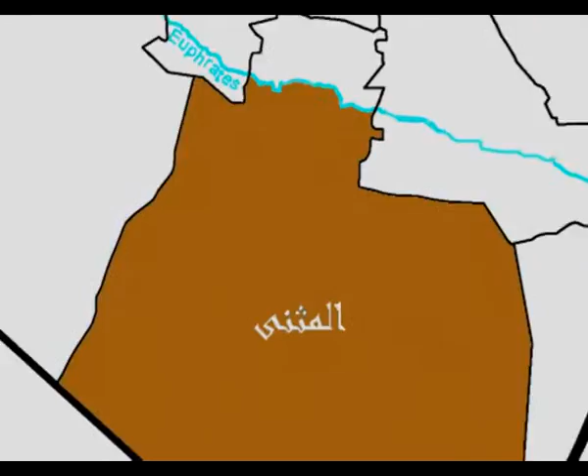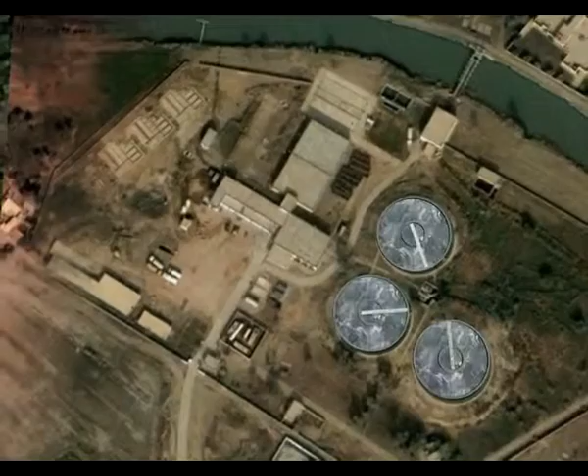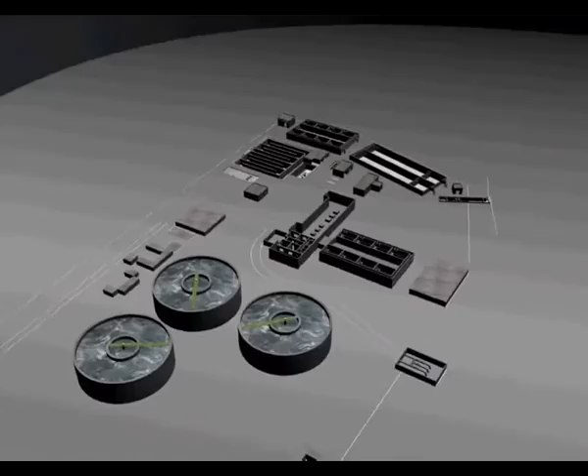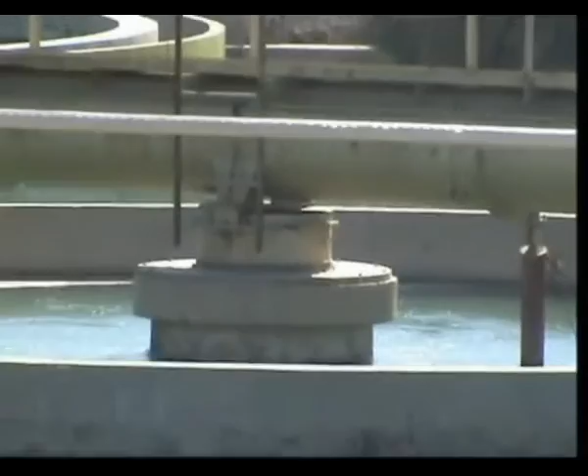The project consisted of upgrading the existing water station located on the shoulder of the Hilla River in the province of Al-Muthanna, approximately 14.5 kilometers from the Euphrates River, with an identified construction site area of 8,500 square meters. The project consisted of, but not limited to, the construction of a conventional water treatment plant with a total capacity of about 40,000 cubic meters per day,

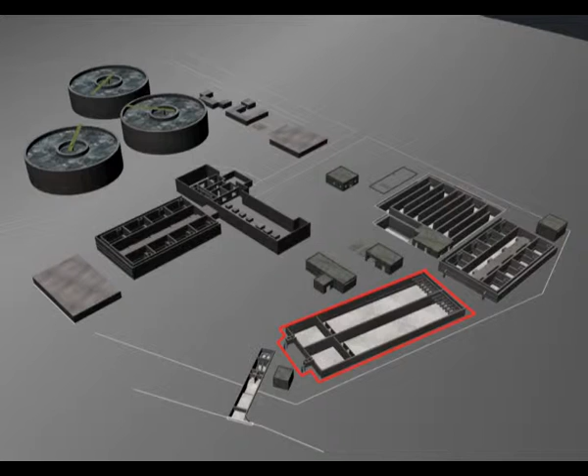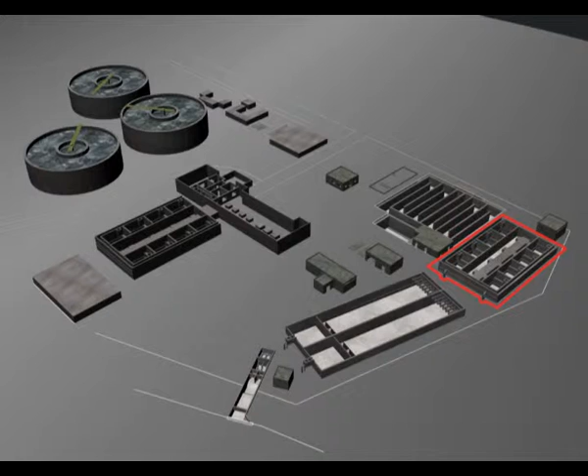comprised of the following units: intake structure and primary treatment system, low lift pumping station with a design flow of about 40,000 cubic meters per day and total design head of 10 to 12 meters, 2 coagulation, flocculation, and sedimentation tanks, each having a total capacity of 20,000 cubic meters per day and dimensions of 11 meters by 56 meters by 4 meters. A filtration building comprising of 8 gravity sand filters with dimensions of 27 meters by 45 meters by 6.5 meters.

A chlorine contact tank comprised of 2 compartments, each one being 12 meters by 36 meters by 4.5 meters. A potable water high lift pump station, 19 meters by 12 meters. An electrical substation and generator, 18 meters by 12 meters. A chemical building, blowers and chlorination buildings, auxiliary facilities, and demolition of reinforced concrete structures.

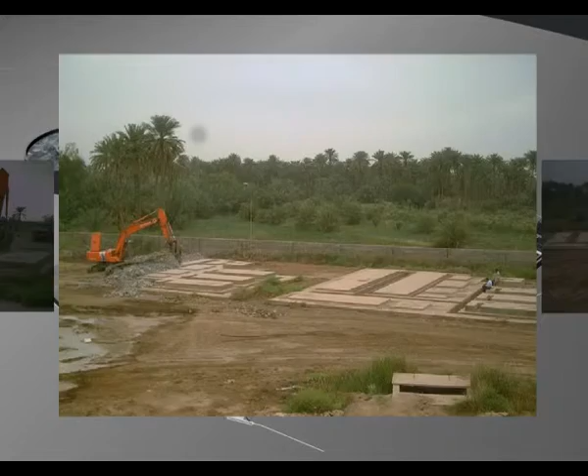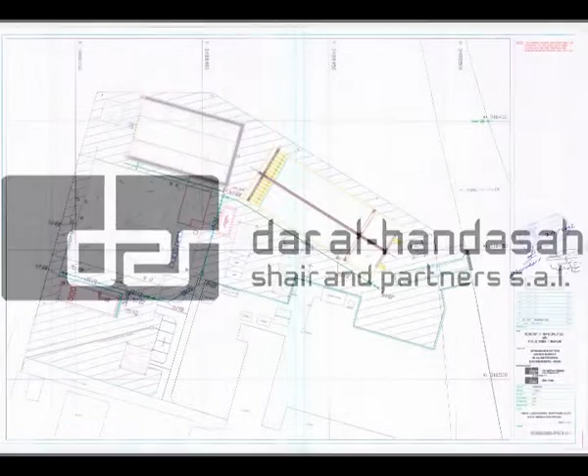The ministry awarded the consulting services to Dar Al-Handasah, an international company with extensive experience in the preparation of engineering designs. They were responsible for preparing detailed designs and tender documents, along with the supervision and follow-up implementation of the selected construction company.

Once Dar Al-Handasah finished the detailed design and prepared the technical specifications for the project, we submitted technical and financial documents under the pre-qualification process. Once we passed the pre-qualification process, the Ministry awarded the project to our company with an 18-month contract duration starting May 10, 2007.

The following is the progress of work. Planning and follow-up by the head office in Amman, Jordan. Our company prepared a detailed timetable for the implementation of various items of the project using Primavera. Due to the vast numbers of buildings, tanks, and other components, and to ensure completion of the project within the contractual period, each part was considered separate from the other during the implementation phase based on the type of service the building provided. It was then handled according to the coherence and logical sequence of events for that building type.

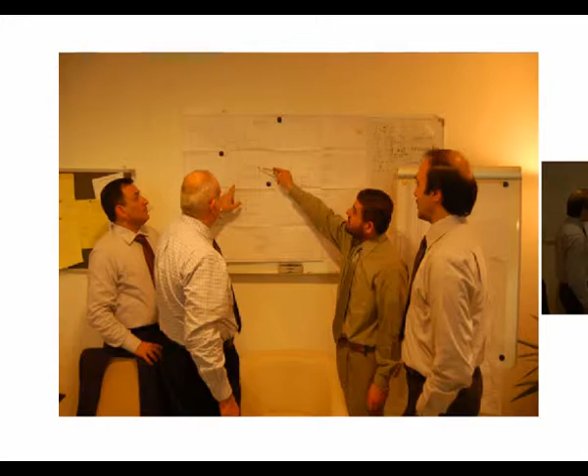After that process was finished, we conducted an engineering review to evaluate the proposals in terms of technical work and developed a short list of suppliers. Suppliers were then selected based on their offer price and technical capability. After reviewing all of the submittals, the final selection of subcontractors was submitted to Dar Al-Handasah for final approval.

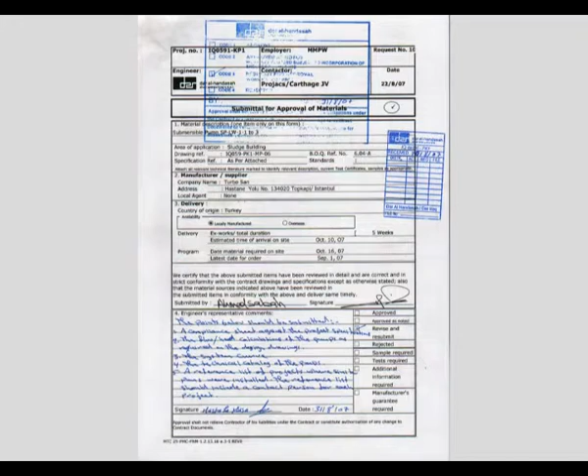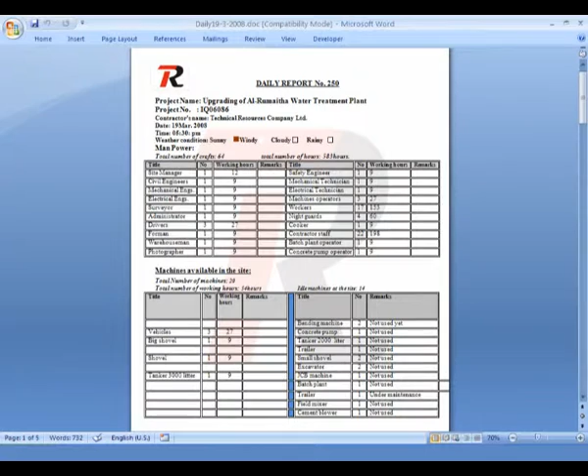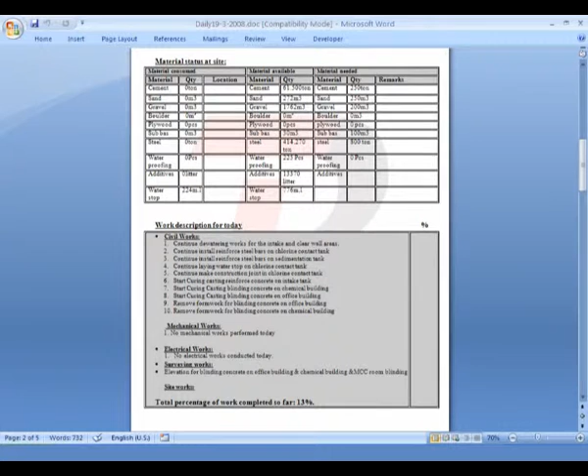It is during this process that a letter of credit was opened to begin ordering supplies at the manufacturing stage and then delivery to the site. During this period, the site manager monitored the project and created daily reports which contained detailed images showing the development and progress of work, in addition to a brief narrative of the events that have been completed that day, events to be completed in the upcoming days, total staff working at the site, available materials, consumed material reports, equipment reports, and any problems or obstacles that impeded the progress of work.

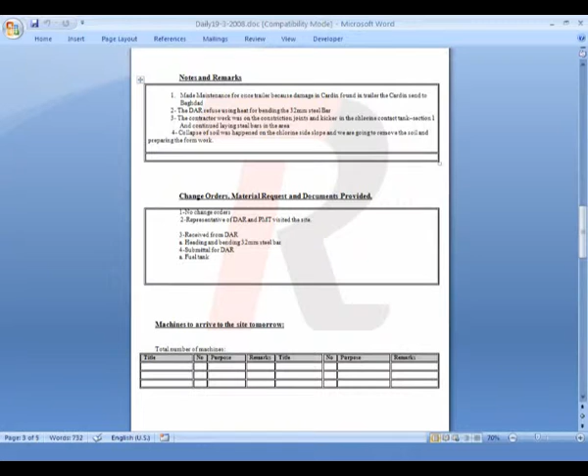It was through these daily reports that a clear picture of the progress of the project was revealed, which allowed us to compare the progress of work against the planned time frame in order to take any necessary action to avoid delays.

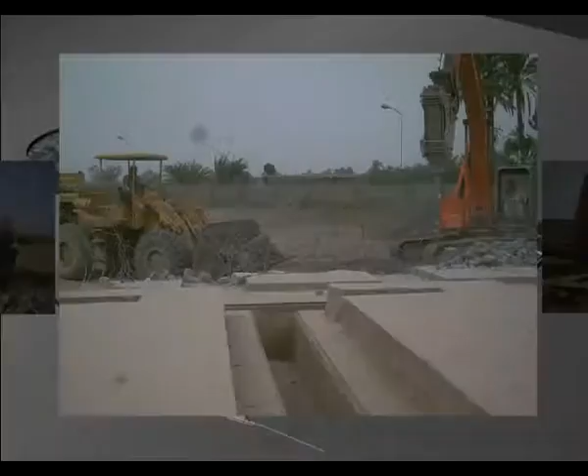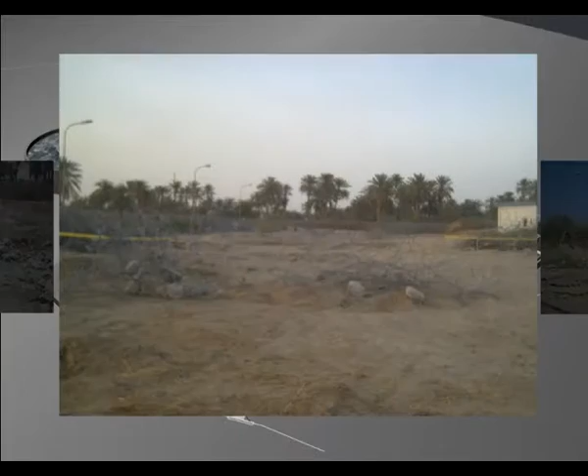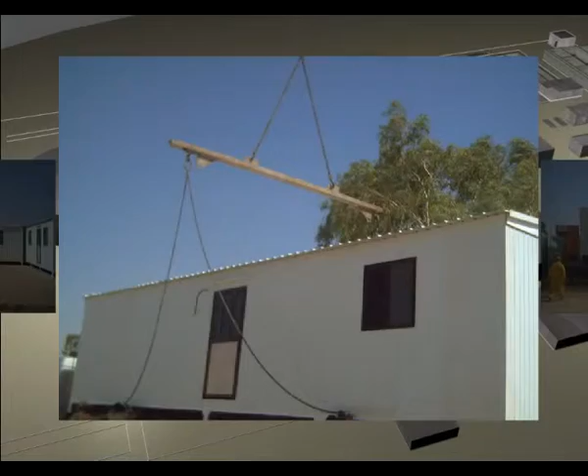Configuration and creation of camps. The next segment of the project was the creation of our work site and the administration offices for the resident engineer and supervising consultant. These sites were equipped with all the stipulated contractual requirements such as furniture, equipment, offices, computers, and 3 2007 pickup trucks. In addition to the necessary camp facilities, we also constructed several warehouses and garages to store the equipment and cars necessary to implement the work.

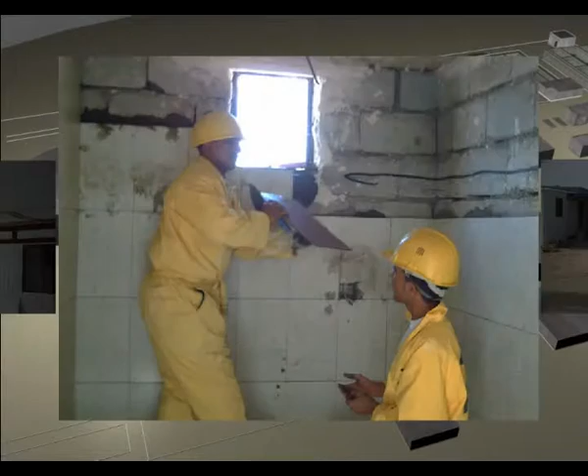At the same time, in order to expedite the work and make most use of time, buildings were demolished and the rubble was excavated to areas identified by the municipality for waste disposal.

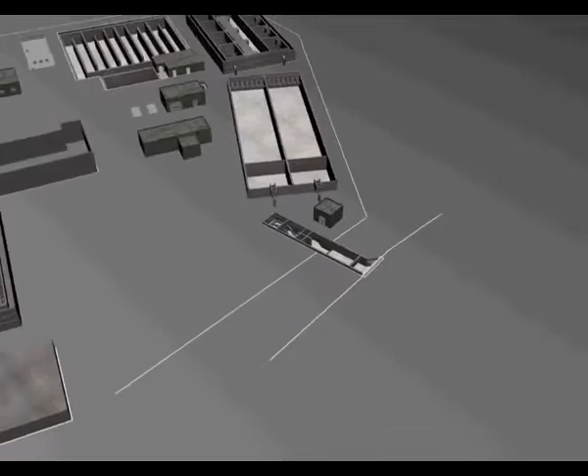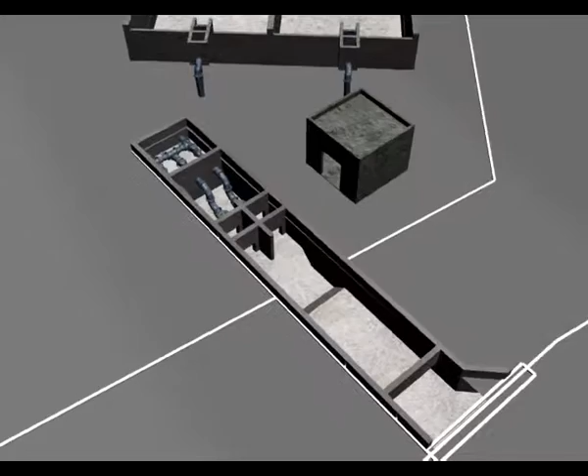Intake structure. The intake structure is approximately 30 meters long, 5 meters wide, and 3.5 meters deep. The main part of the tank was buried underground to allow the tank to fill by gravity flow. The design flow for the tank is 40,000 cubic meters per day to be discharged by 3 low lifting pumps, 2 running and 1 standby, each with a total head of 10 to 12 meters.

In addition to the pumps, there are bar screen and band screens in the beginning and middle of the tank respectively. The minimum water level in the tank is 0.55 meters, and the maximum water level in the tank should not be more than 1.5 meters above the foundation level of the tank.

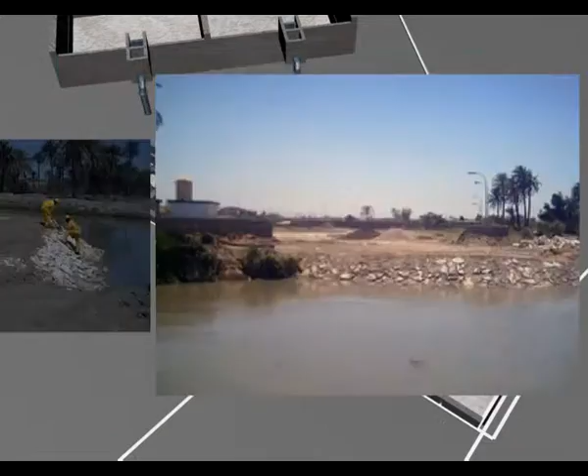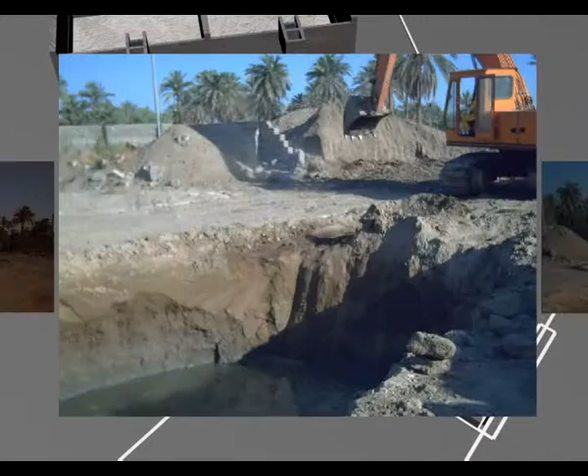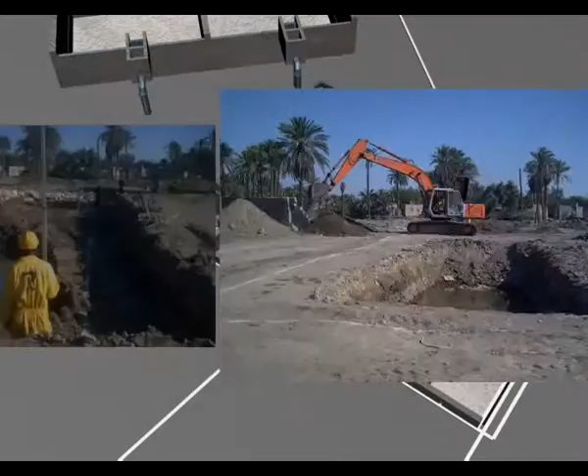Excavation work at the project site, which is located on the shoulder of the Hilla River, started on July 1, 2007. Due to differences in the level of several buildings, excavation ceased on July 7, 2007. After changing the point of reference levels, excavation continued on August 8, 2007 and completed on August 15, 2007. By the end of all excavation, approximately 500 cubic meters of sand was removed and transferred off-site. While this excavation was happening, we constructed a dewatering system to remove the groundwater that was filling the excavation area.

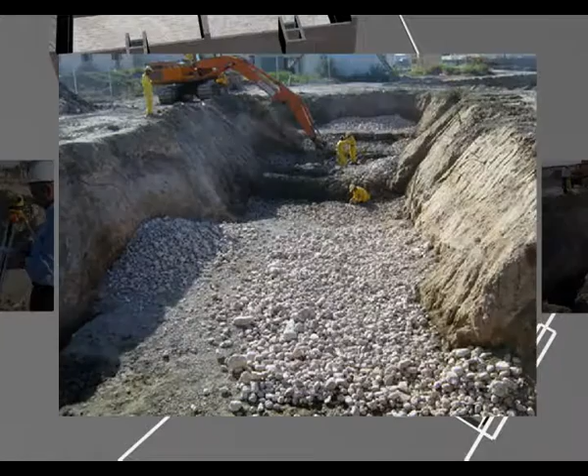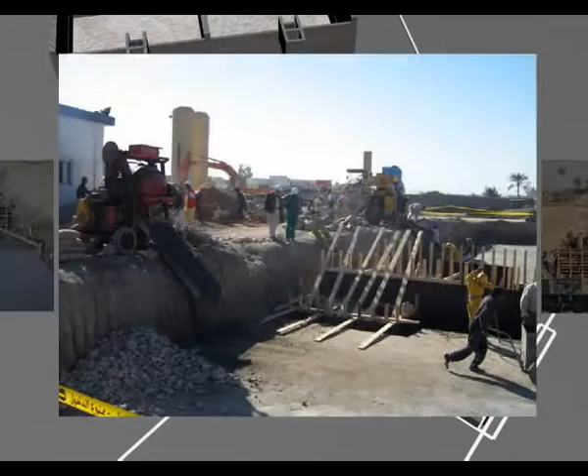Once the excavation was completed, approximately 50 cubic meters of heavy crushed rock was placed to serve as a drainage layer. After compaction and approval by the consultant, approximately 10 centimeters of blinding concrete was poured over the entire base with a quantity of approximately 45 cubic meters. The purpose of this was to provide a base for the steel bar work.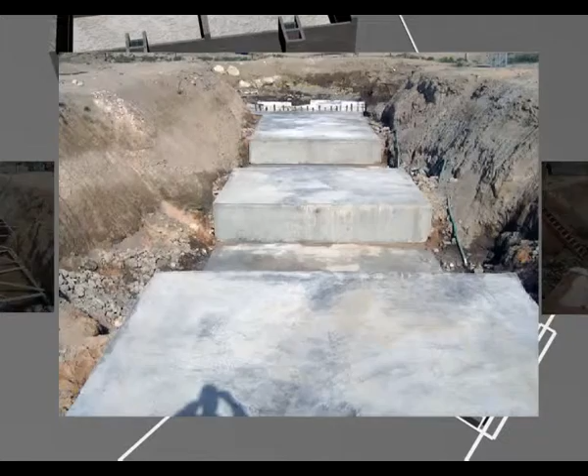Prior to installing the steel rebar, a waterproofing layer of EPDM sheet was laid. In parallel to the laying of this sheet, a cement sand screed was laid to protect the EPDM sheet from damage from rebar steel. After a period of curing the cement sand screed layer, steel rebar installation was started according to design specifications and drawings in order to provide casting for the concrete of the structure's foundation.

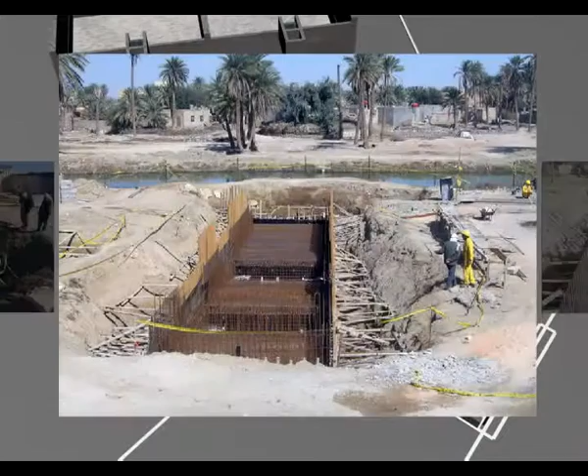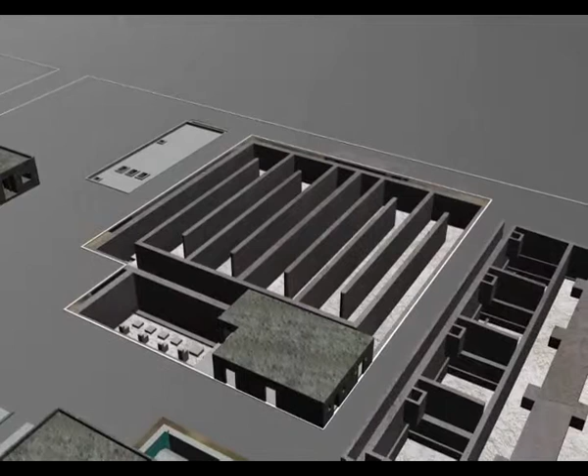Chlorine contact tank. An underground chlorine contact tank comprised of two compartments, each approximately 20 meters long, 38 meters wide, and 4.5 meters deep. The tank is attached to a high-lift potable water pump station that is approximately 22 meters by 12 meters. The clear well can store millions of gallons of clean drinking water.

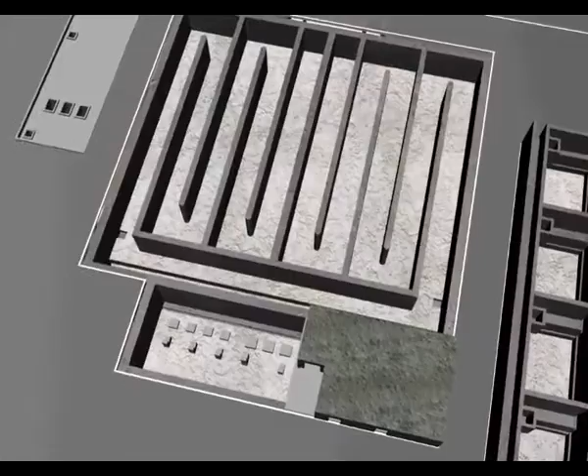Filtered water undergoes a secondary disinfection stage when chlorine is added to the water to kill all the bacteria. 4 submersible pumps, 3 working and 1 standby, each with a 40-meter head pressure, are used to pump the water to the national water grid line.

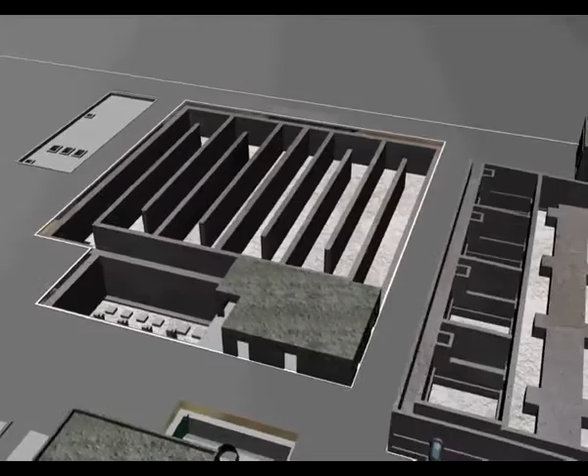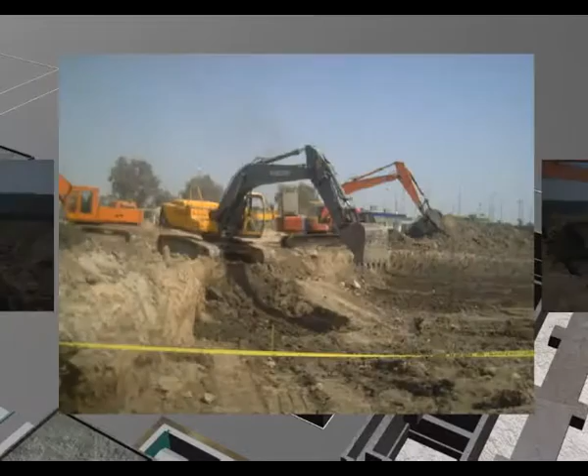Another set of 3 submersible pumps, 2 working and 1 standby, are used for pumping water used to backwash the filters. For this portion of the project, excavation work began on August 16, 2007, with the removal of groundwater resulting from the excavation started on August 21, 2007.

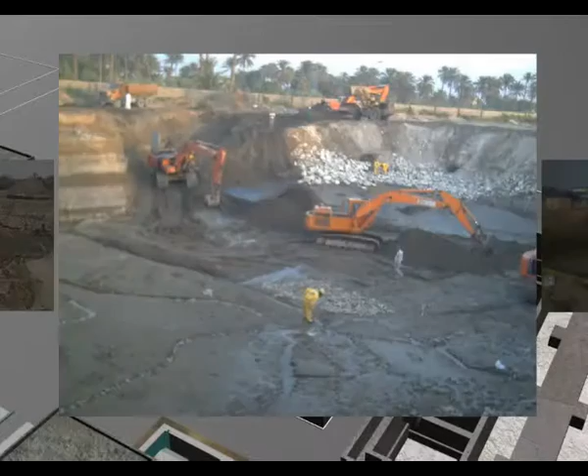After completing the first stage of excavation to about 2.5 meters from the ground level, the remaining excavation was divided into 3 stages. This was done to control the process of groundwater levels, in addition to the maneuvering of equipment in an extremely limited space. On November 28, 2007, excavation work completed where some 12,500 cubic meters of earth were removed off-site.

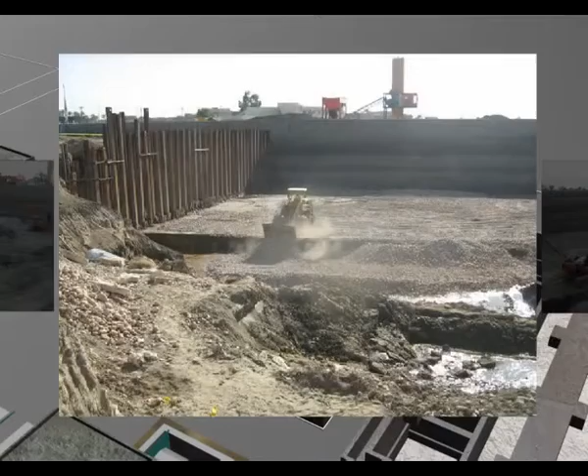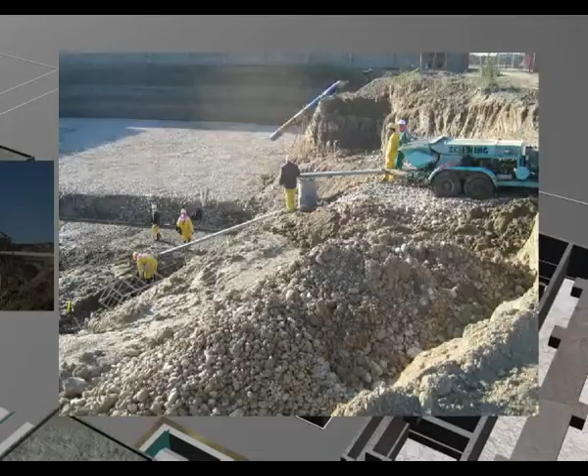Once the excavation was completed, approximately 355 cubic meters of heavy crushed rock was placed to serve as a drainage layer. After compaction and consultant approval, approximately 10 centimeters of blinding concrete was poured over the entire base with a quantity of approximately 350 cubic meters to provide a base for the steel bar work.

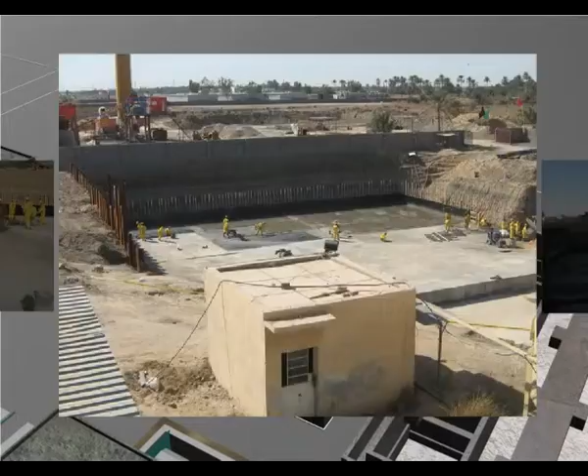Prior to installing the steel rebar, a waterproofing layer of EPDM sheet was laid. In parallel to laying this sheet, a cement sand screed was laid to protect the EPDM sheet from damage from rebar steel.

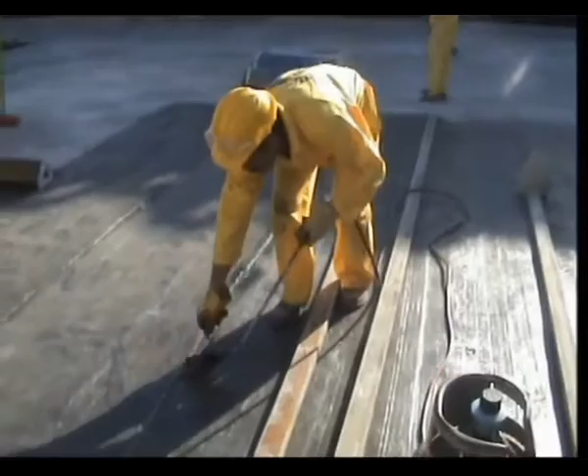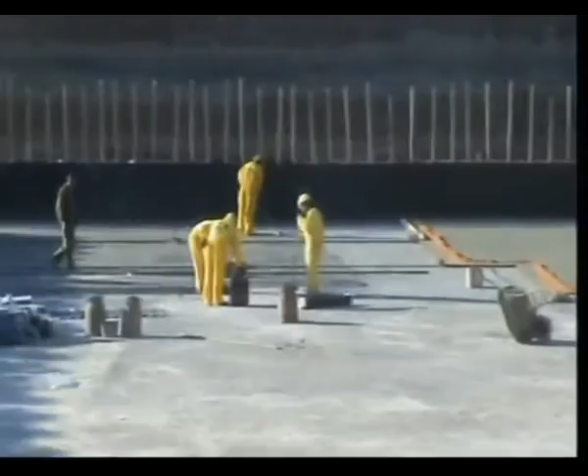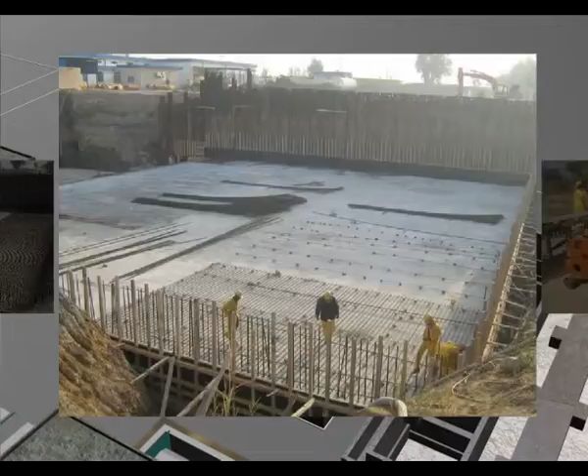After a period of curing the cement sand screed layer, steel rebar installation was started according to design specifications and drawings in order to provide casting for the concrete of the structure's foundation.

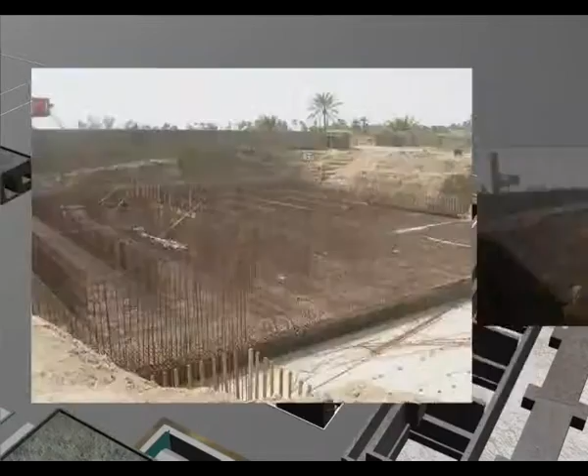Sedimentation and flocculation tanks. 2 coagulation, flocculation, and sedimentation tanks, each 11 meters wide, 56 meters long, and 5 meters deep, were constructed. Each tank has a capacity of 20,000 cubic meters per day. The tanks collect the pumped water from the intake structure and discharge it to the filtration building.

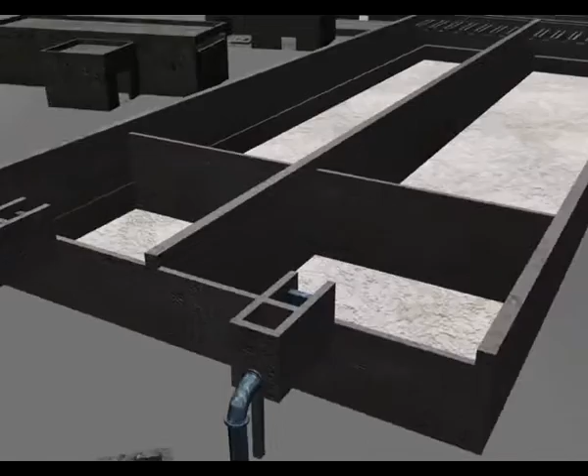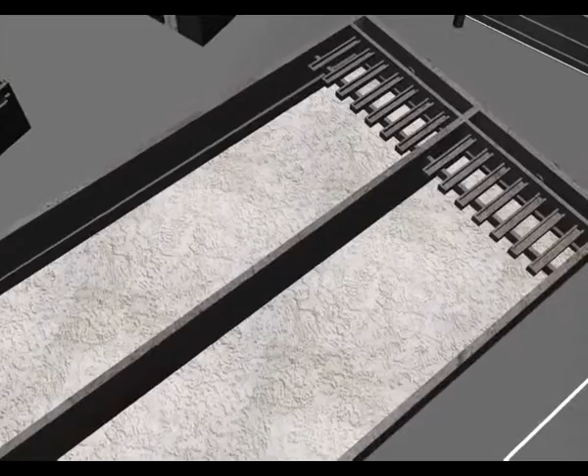Chlorine and alum are added to the water on the flocculation side to kill bacteria and make the solid particles clump together. The clumped particles then settle to the bottom of the sedimentation tank, where they are pumped out to the river by 6 mud pumps. Sludge scrapers scrape the settled particles to the end of the tank into the sedimentation pit. The remaining water flows over the end baffles, then into the filtration tank by gravity.

Excavation work began on November 8, 2007, with dewatering systems in place almost immediately, and completed on December 12, 2007, removing a total of 4,500 cubic meters of excavated soil.

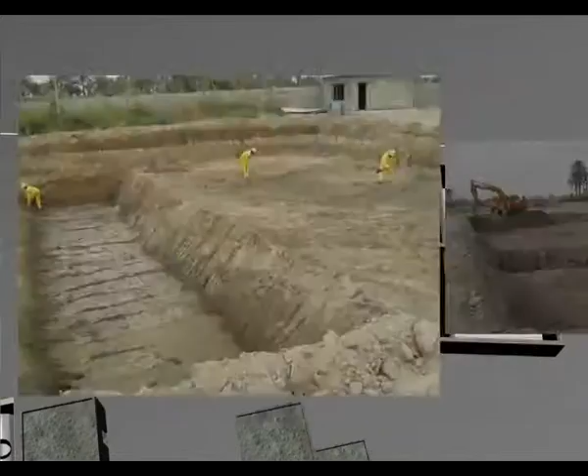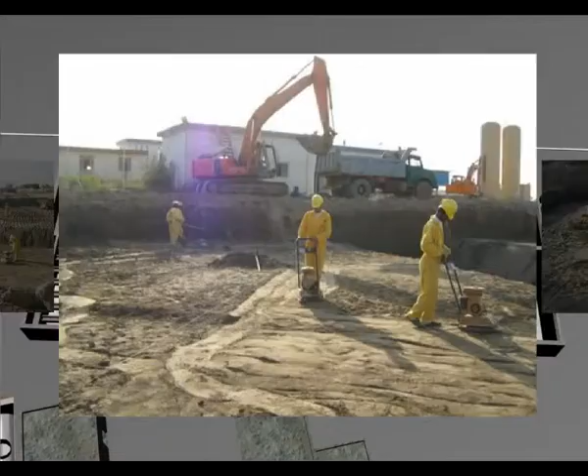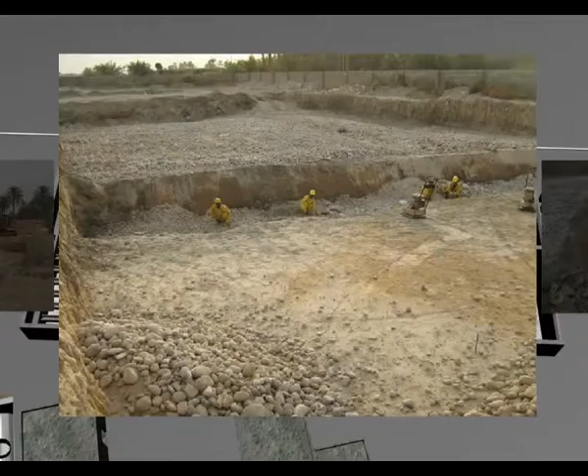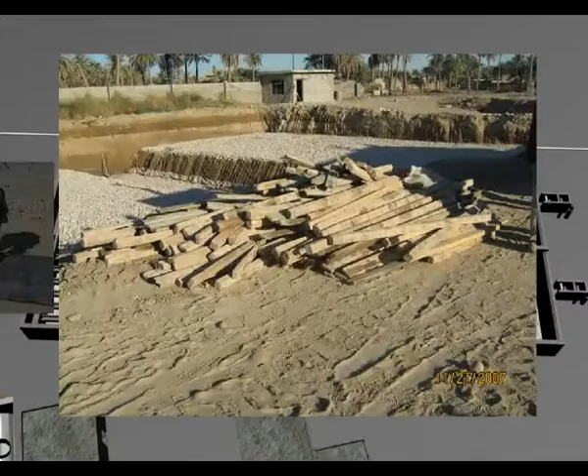Once the excavation was completed, approximately 355 cubic meters of heavy crushed rock was placed to serve as a drainage layer. After compaction and approval by the consultant, approximately 10 centimeters of blinding concrete was poured over the entire area, with a quantity of approximately 350 cubic meters. The purpose of this was to provide a base for the steel bar work.

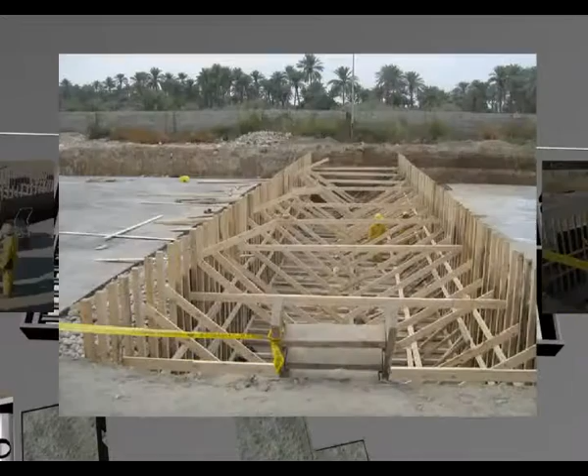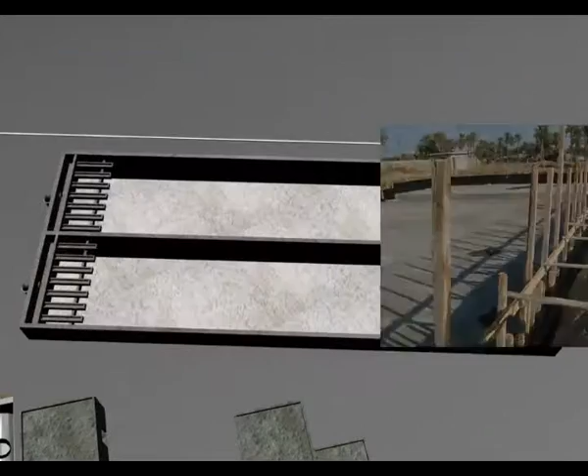Prior to installing the steel rebar, a waterproofing layer of EPDM sheet was laid. In parallel to laying this sheet, a cement sand screed was laid to protect the EPDM sheet from damage from steel rebar.

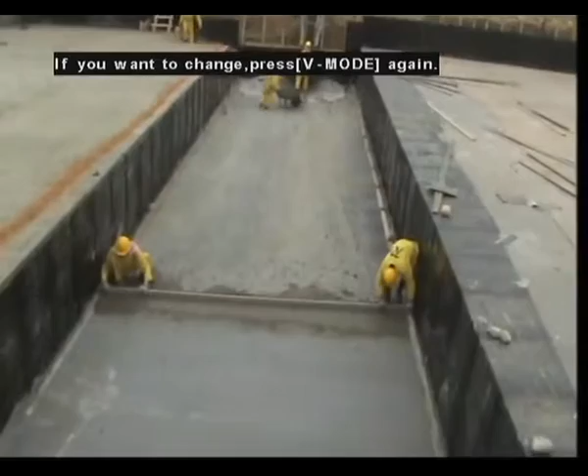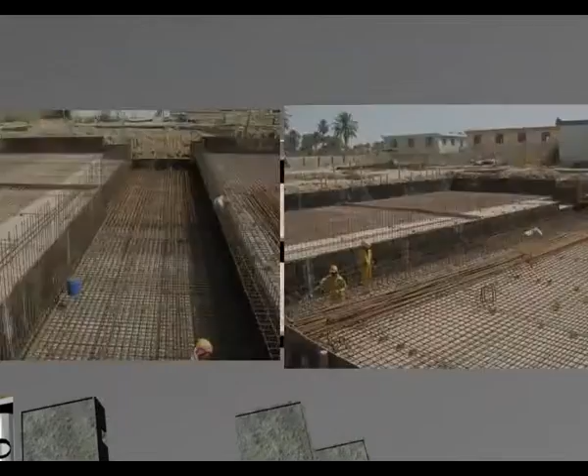After a period of curing the cement sand screed layer, steel rebar installation was started according to design specifications and drawings in order to provide casting for the concrete of the structure's foundation.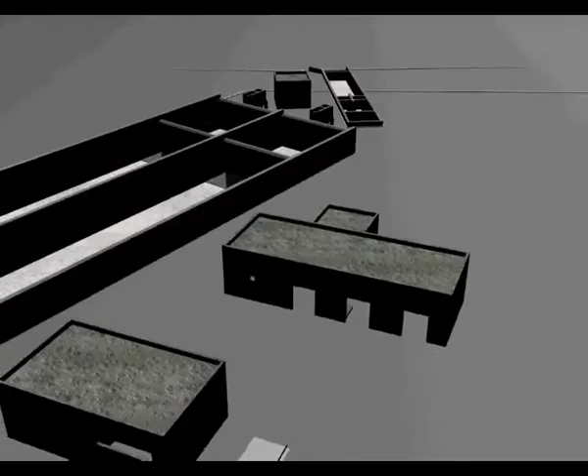Service buildings. Chemical building. The chemical building housed the chlorine and alum systems. The chlorine is added to the water in the sedimentation and chlorine contact tank and the alum is added to the water in the flocculation tank. Both are controlled by systems located in the chemical building.

Office building. An office building consisting of 4 offices, 1 archive room, a kitchen, an electrical room, and 2 bathrooms for plant personnel was constructed. Excavation work began on February 3, 2008, with dewatering systems in place almost immediately, and completed on March 4, 2008, with a total of 1,500 cubic meters of excavated soil.

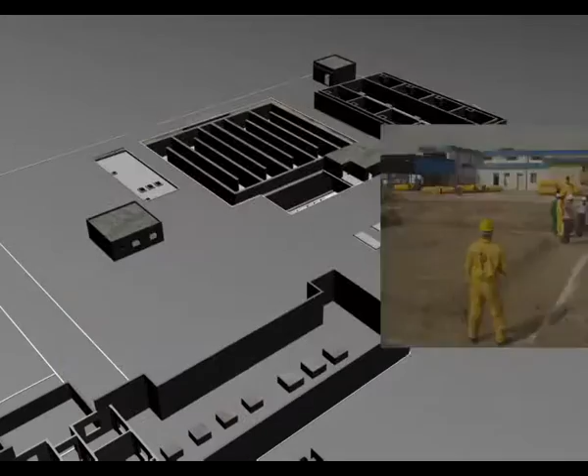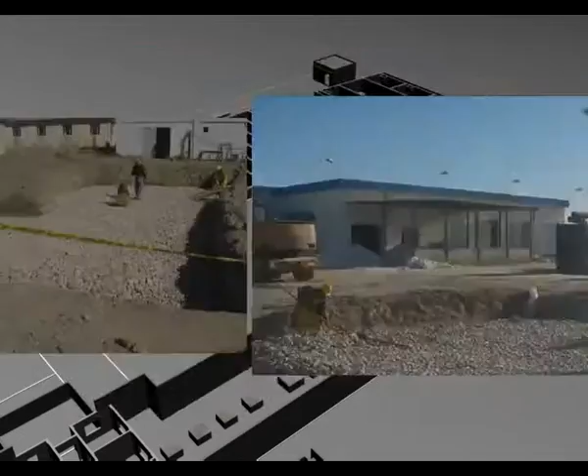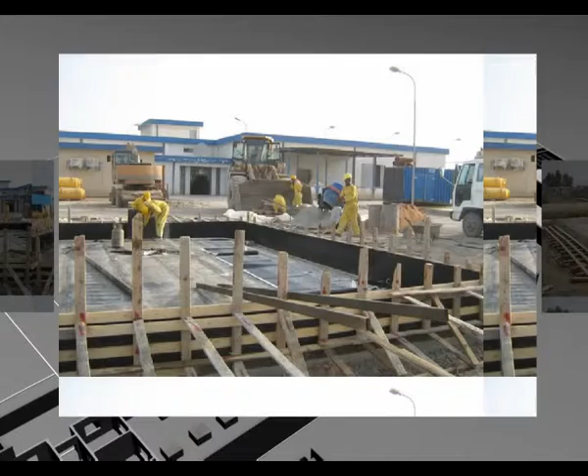Once the excavation was completed, approximately 50 cubic meters of heavy crushed rock was placed to serve as a drainage layer. Once completed and approved by the consultant, approximately 10 centimeters of blinding concrete was poured over the entire base with a quantity of approximately 50 cubic meters. The purpose of this was to provide a base for the steel bar work.

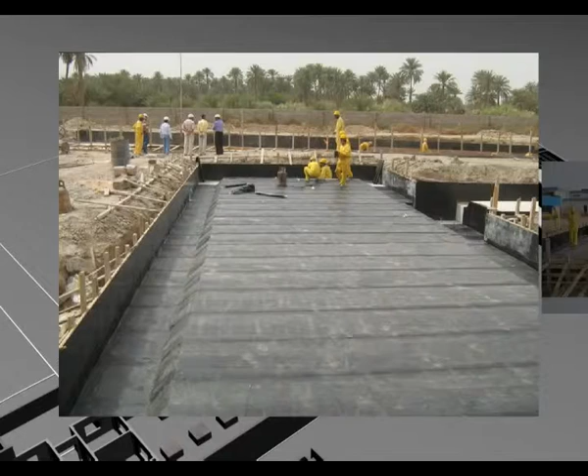Prior to installing the steel rebar, a waterproofing layer of EPDM sheet was laid. In parallel to laying this sheet, a cement sand screed was laid to protect the EPDM sheet from damage from rebar steel. After a period of curing the cement sand screed layer, steel rebar installation was started according to design specifications and drawings in order to provide casting for the concrete of the structure's foundation.